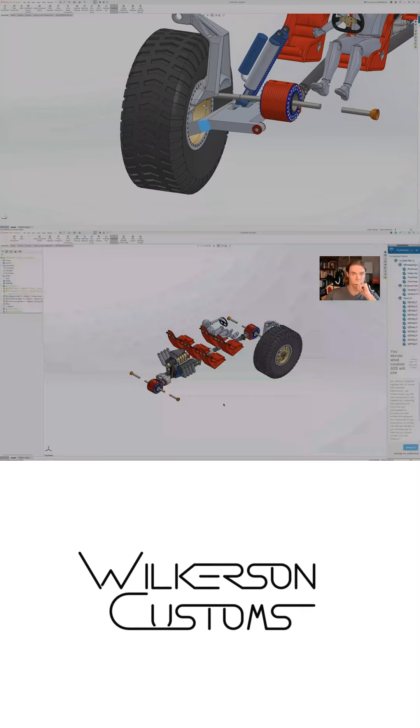All right, so in this video, we are designing the lower control arm for the Ultra 4, and I'm starting by figuring out how I'm going to mount the lower control arm to the frame.

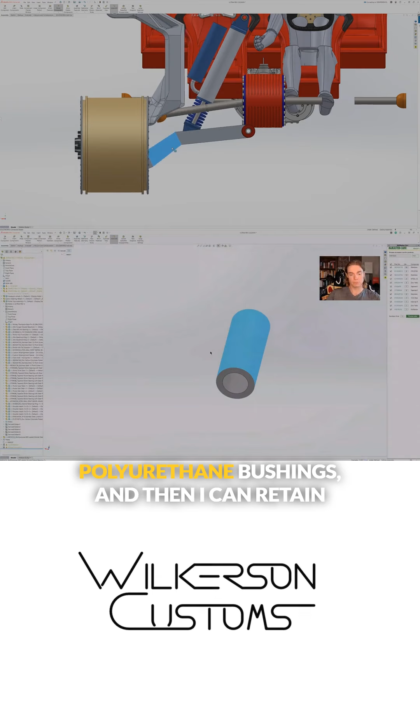I found some really big bushings online from trophy truck parts suppliers, but none of them were quite big enough. So I think I'm going to go with custom sized polyurethane bushings, and then I can retain the same size 1 inch hardware on the mounts that attach the lower control arms to the frame.

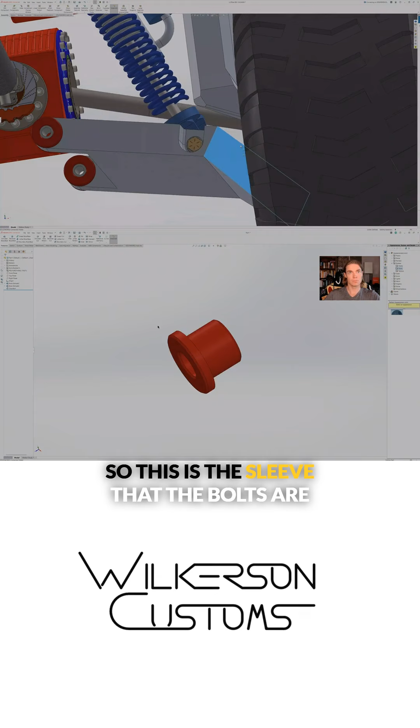So going through the process of designing a custom polyurethane bushing here, this is way bigger than anything that I could find online. And I think these are going to be really, really strong, which is nice. So this is the sleeve that the bolts are going to attach to.

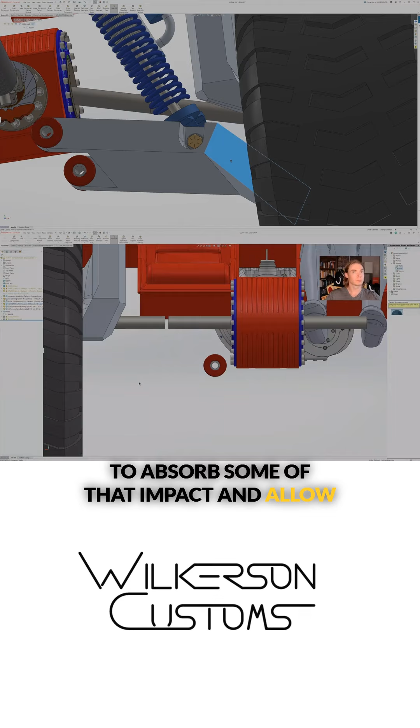So I haven't done this in the past, but this is proper suspension design where you have metal on metal between the sleeve and the bolt, and then you have polyurethane between the sleeve and the lower control arm billet. And the reason for that is that anytime you hit a big bump, that polyurethane is going to absorb some of that impact and allow the lower control arm to flex with respect to the frame, which is super crucial. If everything's hard mounted, then all that force goes into the welds.

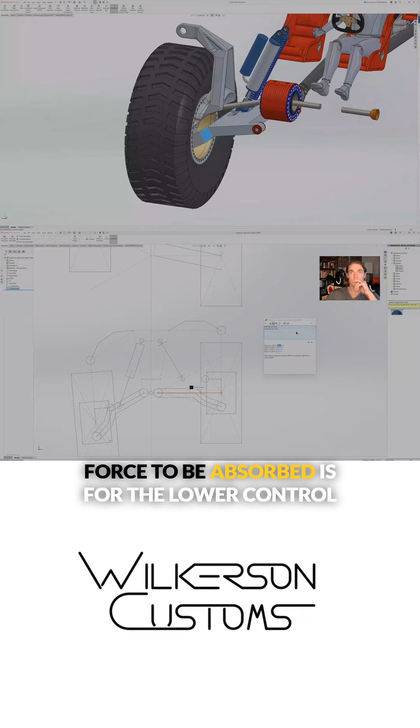And so you actually want a little bit of compliance in the longitudinal direction of the suspension assembly, because the suspension allows compliance in the vertical direction. But if you hit a big rock, the only way for that force to be absorbed is for the lower control arm to move back a little bit by way of compressing the polyurethane bushing.

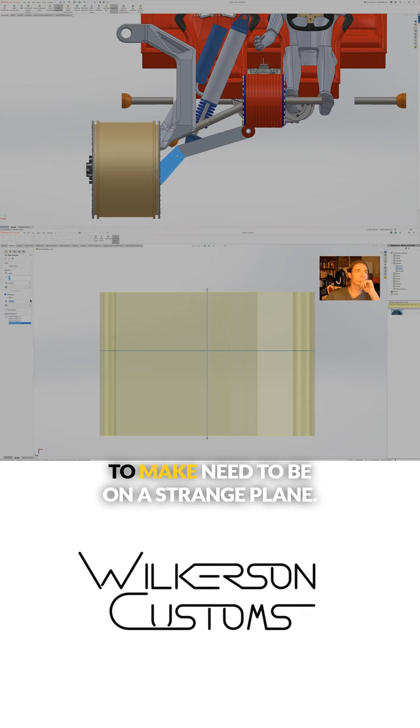And what I'm realizing now is that the cuts that I'm going to make need to be on a strange plane, and if I can get those little angles there to be perpendicular to the angle of the cuts, it's going to make my fillets a lot smoother, and it's going to make the part a lot easier to machine. So that's what I'm working on here.